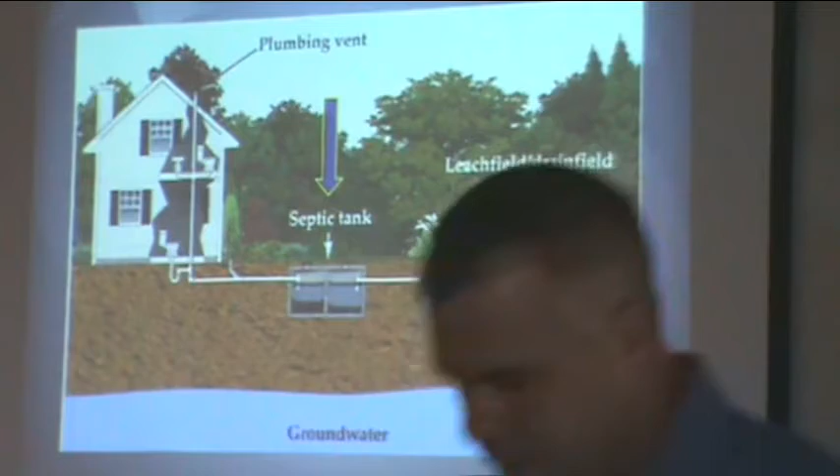If you're going to do that, on the ends of your conduit, both inside the tank and out where you've stopped it around the wire, take some tar oakum, some sealant, shove it up in there so they don't have water infiltration. Because that conduit, when we first opened up that lift station, was bringing about 1.5 gallons a minute into that when we were there during a rainy period. So you want to watch things like that, because it's an open hole. There was shallow groundwater on that lot, and it was just funneling it right into the lift station.

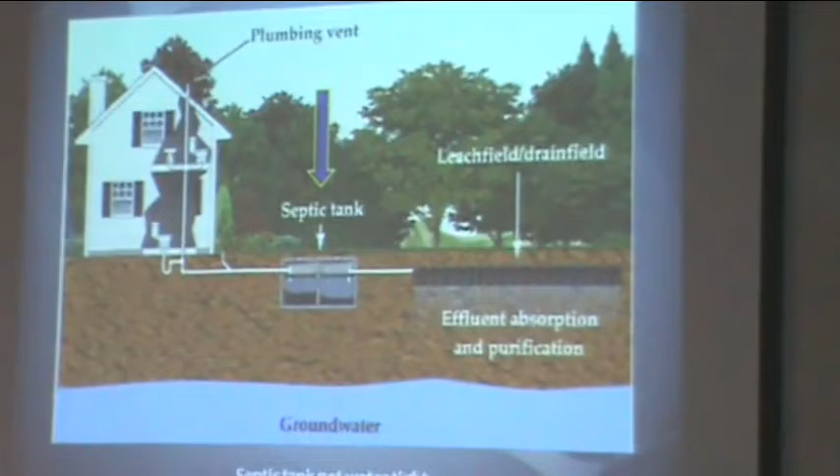Where were you monitoring the flow? Good question. Where were you monitoring the flow? On these new systems, if you have a lift tank, you have an event counter. The event counter can tell you how many times the pump is actuated. When the pump actuates, and you know, because it's been calculated, the volume in the tank that goes out every time it actuates. You can say, I've actuated 10 times, and it was 20 gallons every time. I put out 200 gallons over the course of how long.

So new systems on pumps have event counters or elapsed time meters, something that tells us how much water. Now, if you have an old conventional gravity system, have fun. I've dealt with it. You can't figure it out. But the newer ones, fortunately, that's why they're on there, because you've been blamed too many times for a problem, and it was something else. So the event counters or time meters, whatever, are a nice thing to have to watch your flow. You can't always do that. In that instance, no, you can't do it here.

Wouldn't the Mark 1 eyeball work? I mean, you look there, and my God, if it's 99% clear, it's got to be infiltration. Okay, sometimes that works. When you're looking at water that's ponding up or coming to the surface, if it's clear, you can make some assumptions, but you can't go too far with that. If it's clear, it probably is water from somewhere else. I agree with that, but you can't always tell that. It's a tool, but you can't always tell.

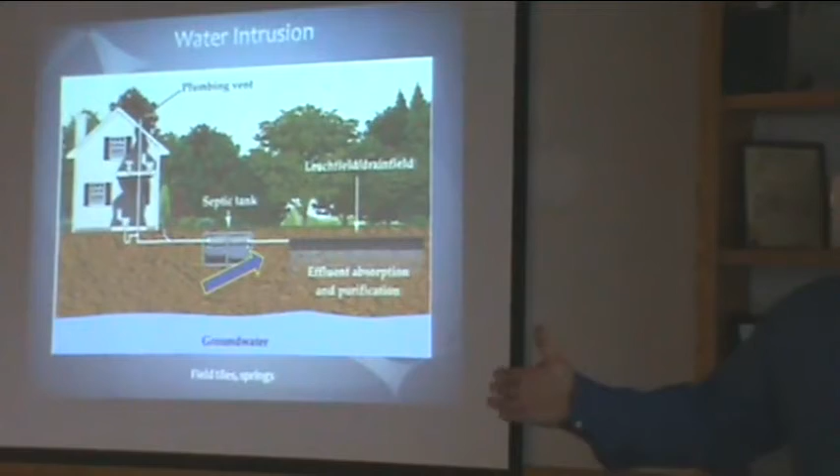Groundwater, okay, so we moved past the tank. What about the system? This was another one we identified as a problem. Field tiles. I can't tell you enough to watch the field tiles. Watch your spoil as it comes out. If you see tiles, stop and figure out what's going on, because they will cause you grief. You will be out there repeatedly if you've got tiles coming in and out of that system.

I'll give you another example that happened to us, 2 years ago or so, out in Osnaburg Township. We had a system go in. It was a shallow system. It just took on tons of water. And you know the question, okay, where's it coming from? And I was out there. I vaguely remembered having seen next to a tree a piece of tile broken when the inspection was done.

Didn't think much of it at the time. Then we come back, and I said, you need to dig right there. That's where I saw it. Dug it up, bango, there's the tile. So the tile was bringing water into the system, but it was also under the system and taking water, not as effectively, but it can take it away from the system.

We've seen systems that had just standard leach system, maybe 900 lineal foot of lines. You'll get the first line half full of water, dry. You go down 3 lines down the hill, full. Because that tile is transmitting water from one line to the next line. It can drive you crazy. So watch your field tiles. If you can at all help it, take care of them at the front end and don't have to deal with them at the back end.

Especially if you have an interceptor drain, that's where you're going to watch. That's your deepest component. You can miss it. It may be deeper than that, but keep your eye out for it.

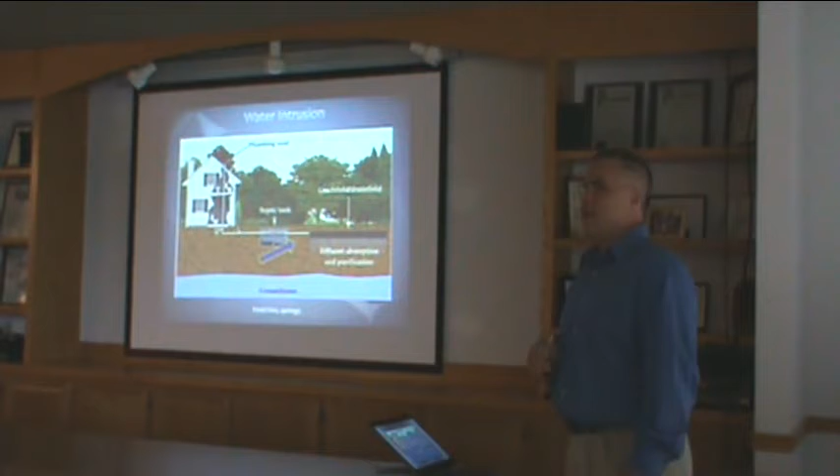Springs, we try to identify all of that during the site evaluation before the installation ever takes place, but it happens. So when we do that evaluation, we're looking for grasses on the surface of the ground, of course, water that's springing up. They tell you that there's a wet spot there, and if it's in the middle of nowhere, it'll beg the question, why? And we try to address that, but I've seen that happen too. The homeowner says it's your fault, it's my fault. It's a spring. You can't do much about that. We want to be careful to watch for it.

Poor surface drainage, again, another thing we try to address during the site evaluation. We don't like to see systems down in the toe slope, bad place, too much water's coming across it. So we try to watch poor surface drainage from the beginning, but oh yeah, let's not forget grading. Probably on the mound systems, there's a few that have failed due to overuse. Probably the next biggest problem on a mound system is it's a dam. It causes a dam right in the middle of the yard if it's graded in a certain direction. So we want to try to deflect water away from mound systems.

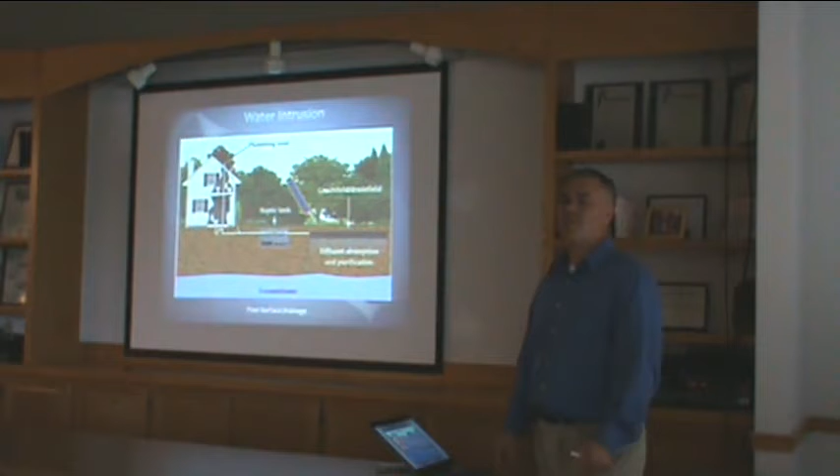Grading around tanks. Yeah, and we've seen water funneling into tanks too. So get that positive grade away from the septic tank. And when it comes in, again, you'll go out there how many times? You don't want to go out there in the rain, right? So you go out there and it looks fine to me. Well, wait till it rains and it's all funneling into the tank riser. So it'll drive you crazy, if we can head it off at the pass at the beginning.

That's Laura's graphics.

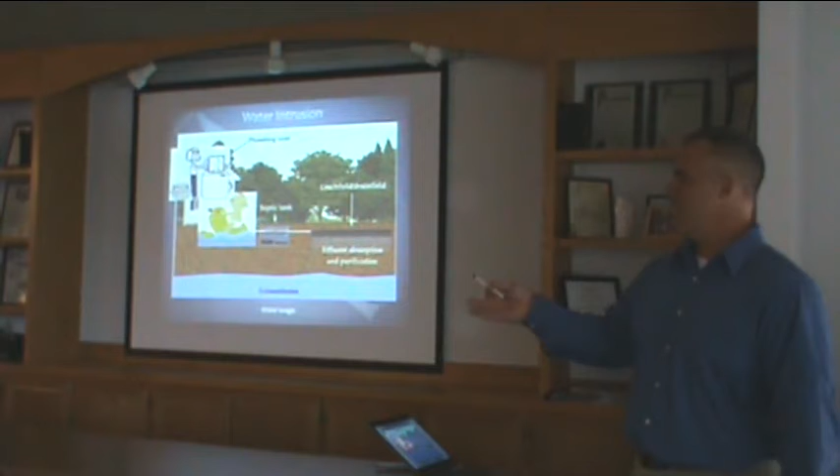Water use. We got another good example of water use that just recently happened. We dealt with a small ice cream stand, and we designed it for, I think it was 400 gallons per day flow rate on this little ice cream stand. Well, we didn't know that they ran the dipper well all day. So the flow rate, again, using the event counter, was, what was it? 700. 700 gallons a day in a 400 gallon per day system.

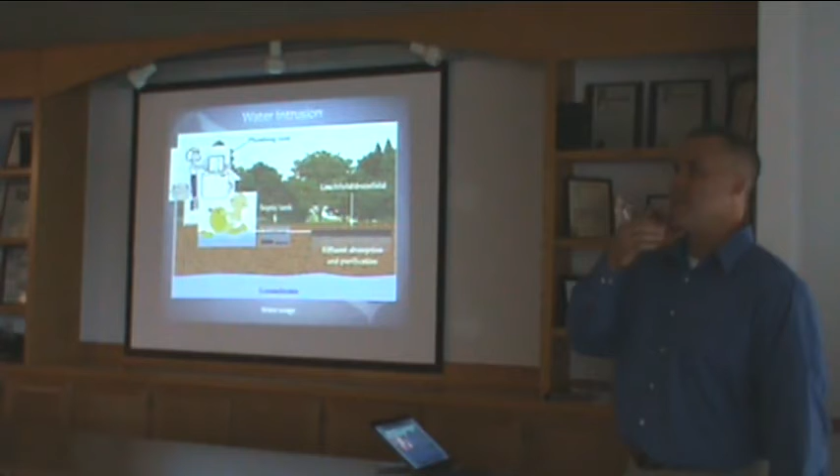And that 400 gallons is peak flow, right? That's not average flow. So 700 gallons a day because of a dipper well. And if you've ever watched the ice cream stand, that dipper well is constantly running a small stream of water. You'd never think that it produces as much. That's what, 300 and some gallons a day from a dipper well. So he had to basically change his whole operation, the way he does business, because of his dipper well.

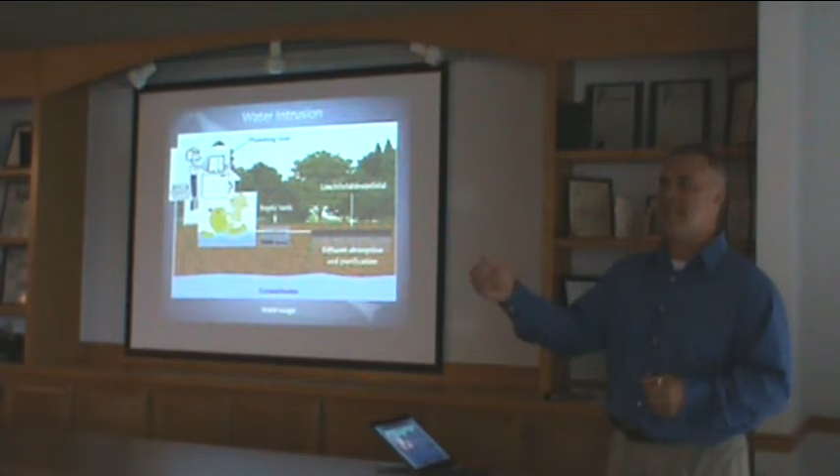And see, where that comes from is it's on the other side. It's our food people downstairs telling you you've got to either have a dipper well or do it some other way. So you got this issue of sanitation, making sure that you don't got scuzz on the dipper when you're dipping ice cream, but you have to deal with the sanitation, at least he does. And then here on the wastewater side, we've got too much flow. So water usage is a problem sometimes.

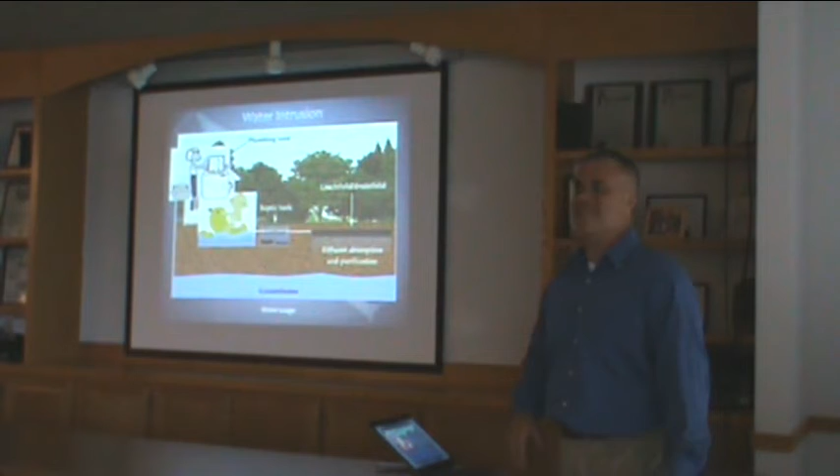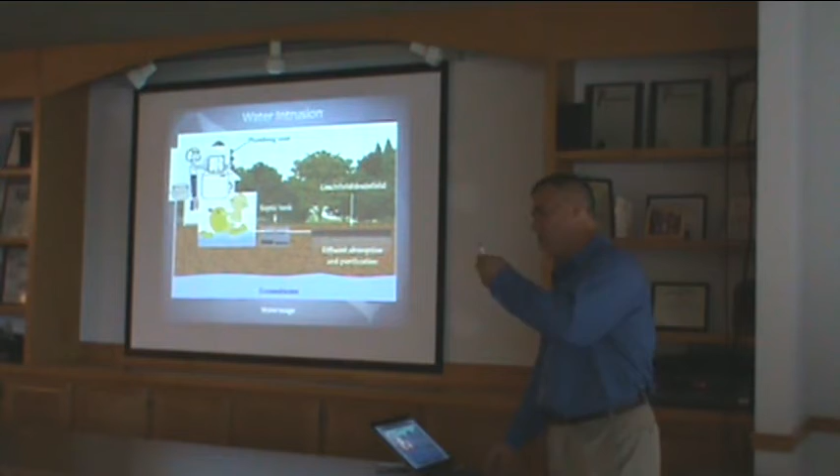And you know as well as I do, you may as well not even ask the homeowner how much water they use. Don't even ask, because they won't tell you the truth, or they don't know the truth. The rare homeowner will say, I had one just lately out in Washington say, I use way too much water. Wow, that's the first time I've ever heard that. But otherwise it doesn't happen. So you really can't trust what a homeowner says about their water usage, especially on your gravity systems. They're very difficult to figure out. So again, we wanted to bring this up because this seems to be such a prevalent problem. Every one of us will pull our hair out trying to figure out how to fix that problem.